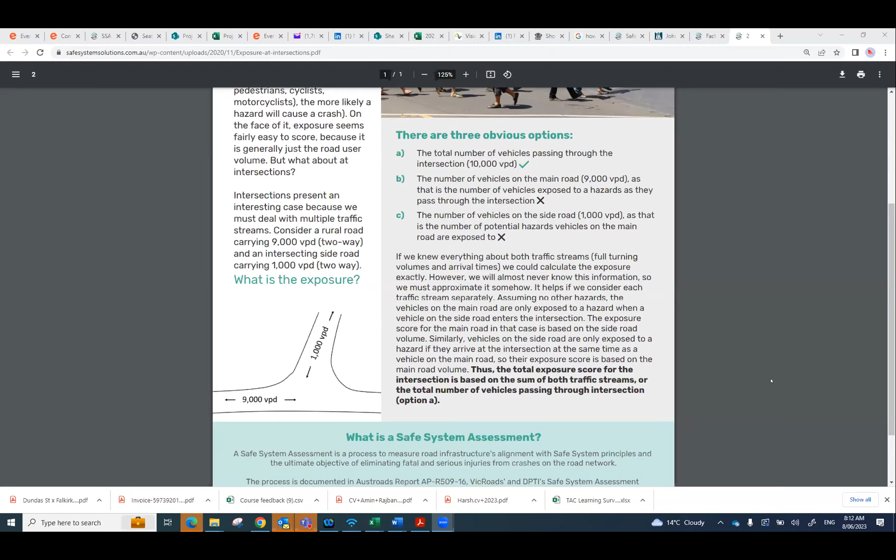Okay cool, thank you. Thanks Miles. And I think we might have another hand up even - this is great, yeah, we've got Alan as well. Hello Alan, I'll drop Miles away.

But there you go, as easy as that to ask your question. So hopefully Alan will find the unmute button there. Waving, hello, can you hear me? Yes. Okay, hello Alan, how are you? Yeah, good. Where are you calling in from? Yeah, from Christchurch. Ah, very nice. Yeah, so I have a question.

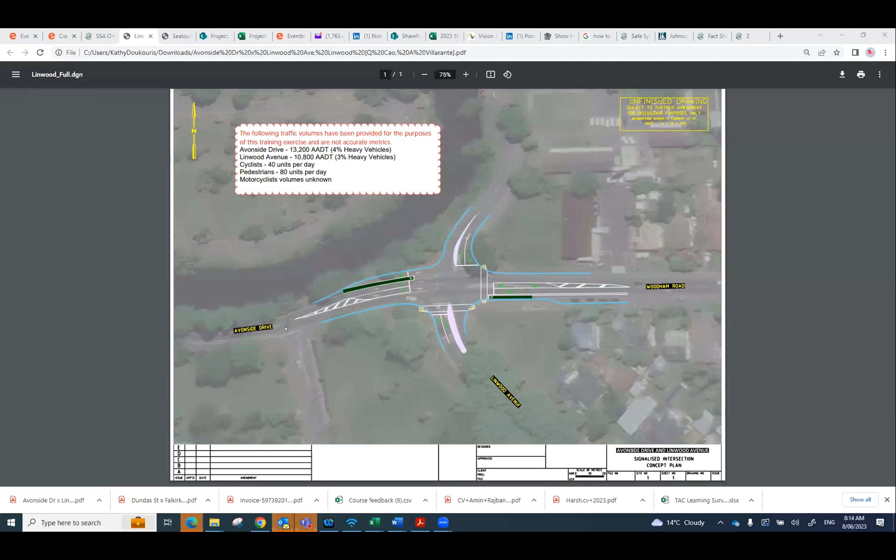My assigned task is about an intersection, and I went over the area and realized there are schools, a couple of high schools, both girls and boys high school, and then a church on another street or road, and there are hospitals. So to what extent will I analyze the intersection? Will I be focused only on the intersection, or from the intersection, how many meters for each road will I analyze? There are risks in each corner, four corners, so I want to understand. I would like to know to what extent will I be able to analyze the risks. Will it cover the schools nearby?

Okay, that's a really important question around defining the scope of your assessment and the limits of how far you go, because you're right, you could get to the school and then walk a little bit further down the road and see some other risks, and keep walking and then you've done a safe system assessment of all of Christchurch. We've got to limit this somewhere, and the nature of a lot of safe system assessing is around understanding the safety benefits of the upgrades and whether we can do more with those upgrades.

Your scope and limits of your assessment are usually dictated by the client in terms of what their project scope is. Now, you can push them a little bit and give some encouragement for them to consider other aspects. Certainly in one like this, I would be looking at the pedestrians and cyclists coming from the school and how they're going to cross that road - so how are they going to cross Woodham Road there.

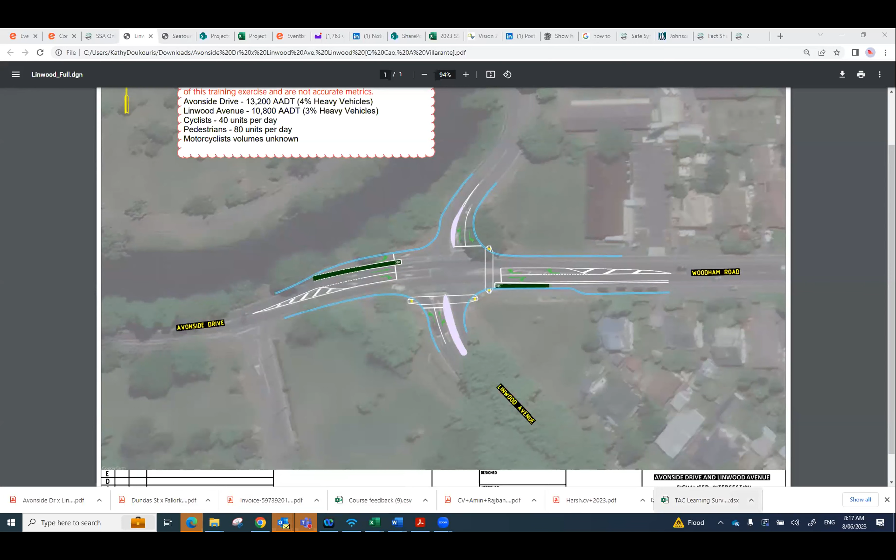That little side road over to the west - I'd include that just due to its... I wouldn't really be including it from a volume perspective, but more thinking about how it's influencing likelihood of crashes, and potentially severity of crashes, but more probably likelihood of crashes associated with queuing and vehicles coming out and the like. So it would play a more minor role in that, but certainly my focus would be on that intersection. So I haven't directly answered it, but you make a judgment call based on that.

What I'm particularly happy with is that you are thinking about land use, and you're thinking about what is that going to generate, and how's that going to alter our exposure, likelihood, and severity.

Correct. The presence of the school and the church facility and the like, to me, will certainly influence likelihood of crashes due to the fact that we know school kids are more likely to be involved in crashes - they haven't developed their cognitive pathways as much, so they'll take more risk without understanding the implications of that, and they're more darty, and hidden behind vehicles, and they skylark and play around and fall onto roads and things like that.

So that then can get factored into your likelihood of crashes, and thus you might be thinking more about features to slow vehicles down in the area, provide school crossing facilities, ensuring we've got connection of separated facilities from the school gates to the appropriate crossing points.

You may even, in a full safe system assessment, drift into some work with the school to talk about safe routes to school and how to use these facilities, and encourage people to use active transport modes on these certain routes to enhance safety.

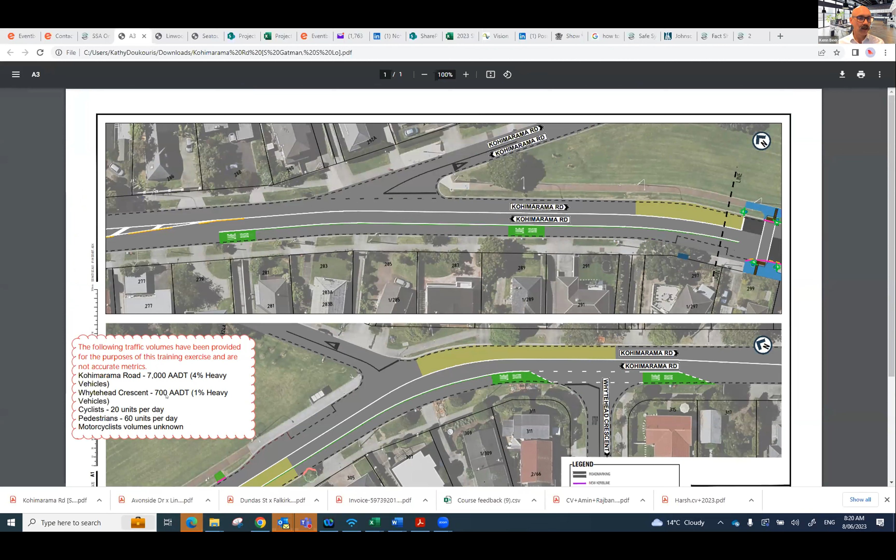Rightio, okay, let's have a look at this. So you're not going to add up each of the side roads and the main road volume. Well, for this one, it looks... so what do we got there? Whytehead Crescent, where's that one? There, okay.

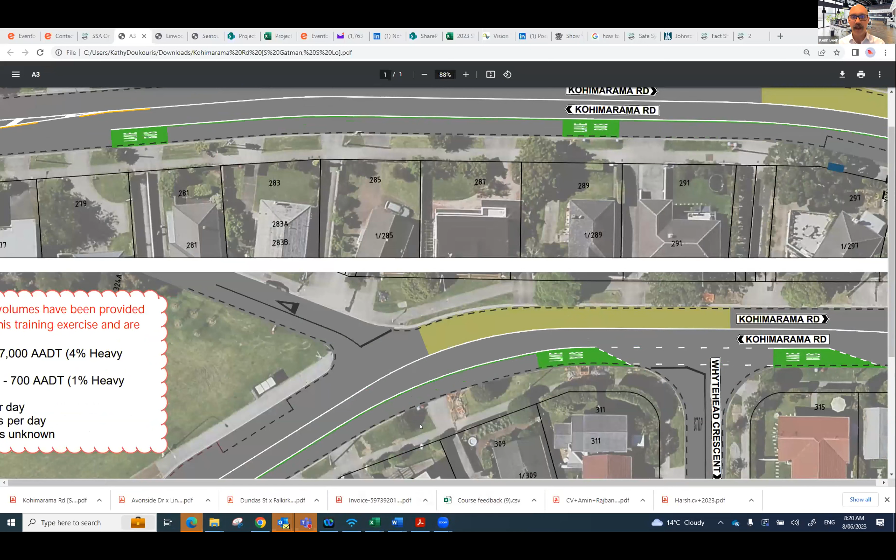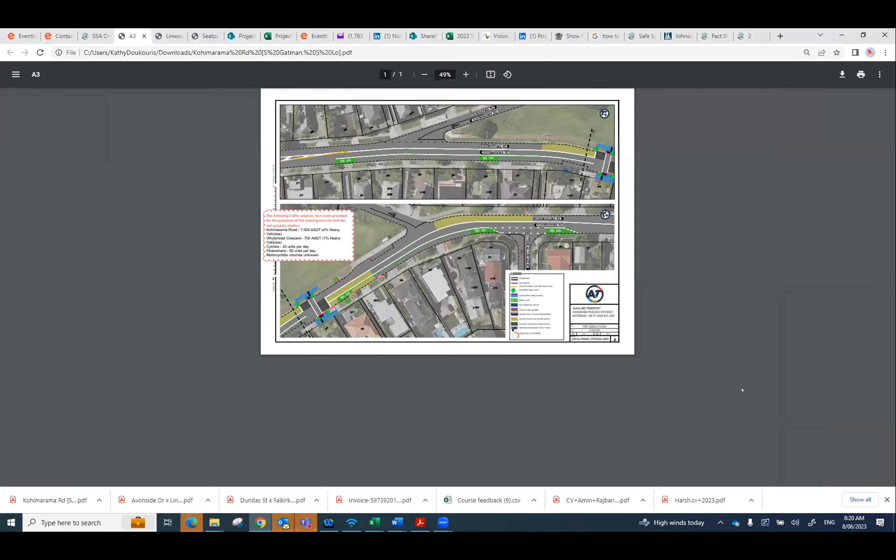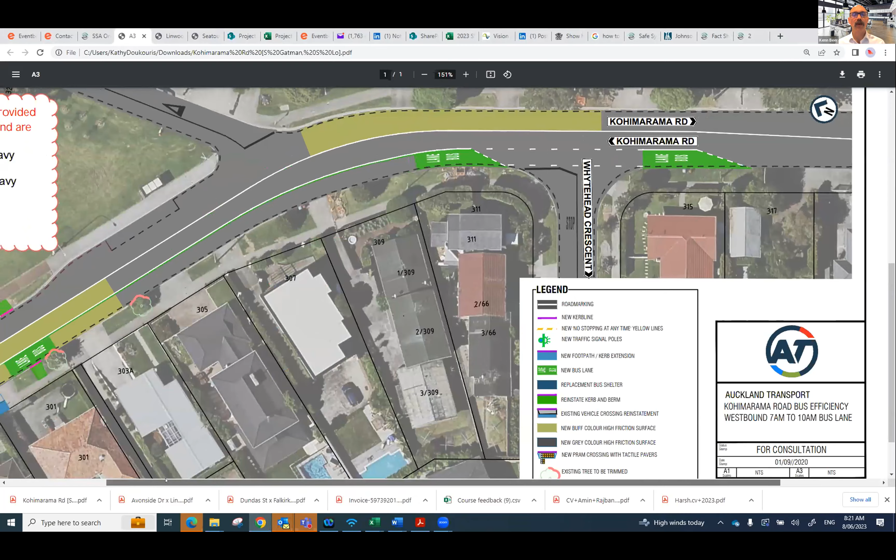Due to the fact that we have given you the specific volume of only one of those intersections, it sort of guides you to say that that is the intersection we would be thinking you would assess for that stretch, because we haven't given you volumes for the others.

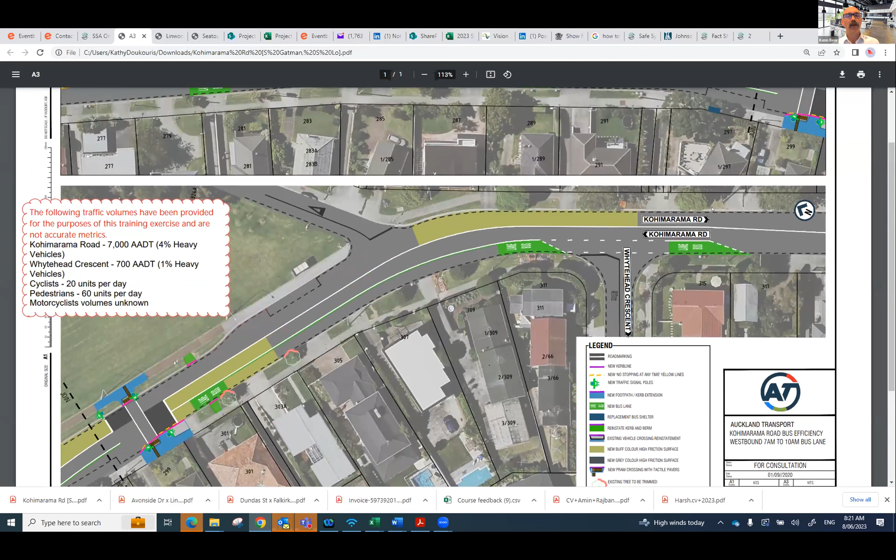However, if you wanted to, in a real safe system assessment, that's an option for you - just look at that intersection, look at the length of the road for all the other crashes. The other intersections may influence your chance of run-off-road and the like, but there is definitely intersection crash possibility at these other roads. So in a real safe system assessment, you've got 2 ways to try to deal with it. Either one, you do essentially 3 safe system assessments, where you cordon off those roads and they get their own matrix.

But because these roads have likely similar volumes, or they sit in the same band in terms of the categorization, you can simply use that band for exposure and then address your likelihood and severity of crashes based on the characteristics of the 3 intersections.

So you might pick the one there with the very odd angle coming in, and you would put... what is it, Kohimarama Road?

You might note that angle influences the likelihood of intersection crashes, and specify that for that particular road. The score would go up, but as long as people are reading the text, they know where that's coming from. It's like if you have the whole length of a road, you're going to have one or two spots that influence the likelihood and severity of a runoff road crash - particular power poles, trees, or curves - but you still give that runoff road score to the whole route.

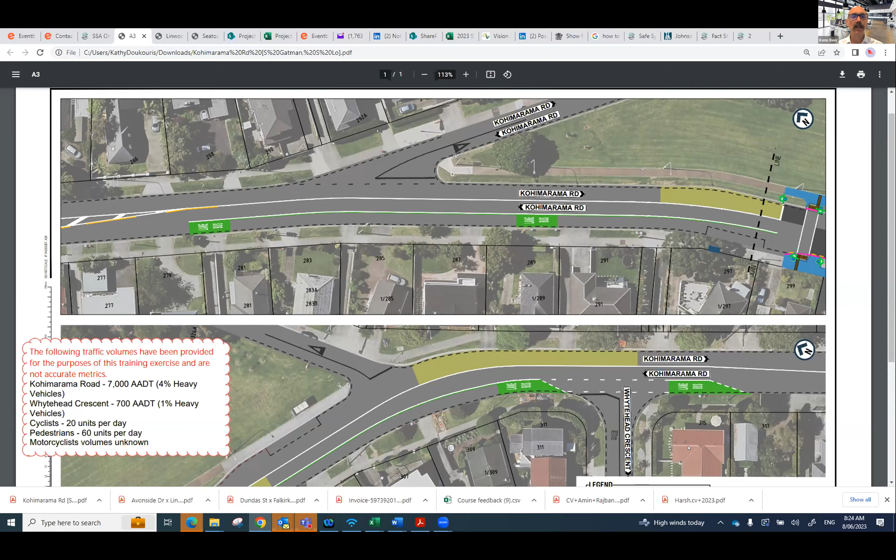Generally, intersections of like volumes can be lumped together, as long as their form isn't majorly different. If I had signals and then a roundabout, I wouldn't bulk them into one assessment - they're just too different. But these are all give-way controlled, and yes, they've got different likelihood characteristics based on things like sight distances, skewed angle, interaction with through roads, bus stop locations, and dynamic visual obstructions. But overall, they have somewhat similar risk characteristics in terms of exposure and severity.

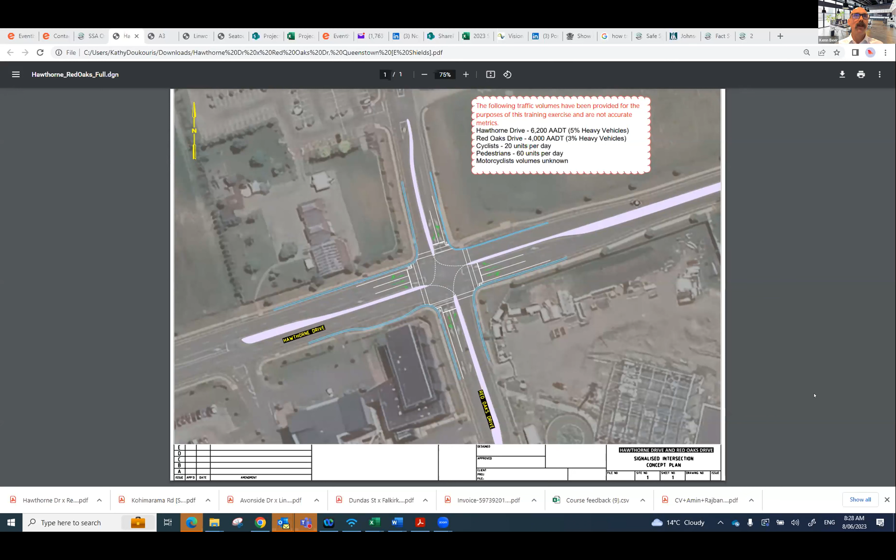The alternate way, and probably the one you'll use for this assignment at least, is to ignore it essentially for the scoring and the matrix. Put commentary in your recommendations around the interaction during market time. In a full safe system assessment, there are those qualitative questions I took you through at the end, and that's where, for this particular circumstance, you would probably have a lot of information around that one question.

In the qualitative questions, we said, are there special activities, on-road events, and those sort of things. So you would really get into that, and you say, well, okay, this is what happens, this is what changes, this is how it happens. If they're going to upgrade that intersection, we need to factor that in. Have we thought about this massive increase in turning volume or these big waves of pedestrians coming through? And you'd make lots of commentary around that, which would then potentially feed into recommendations.

Yes, so it becomes less rigid in terms of the assessment, exposure, likelihood, severity on all the different crash paths. And it becomes more than this supplement to that, to say that's all fine for the bulk of time, but at this particular time, we've got some changes happening.

Okay, sounds good. Thank you.

Well done, though. And again, another example of where we're thinking beyond just a typical design review. I mean, some design reviews would get into that in a wider sense, but really a lot of design reviews are just, is that curve radius meeting standard, and have we got adequate drainage? And these are important things, don't get me wrong. But then it's kind of like, that's done.

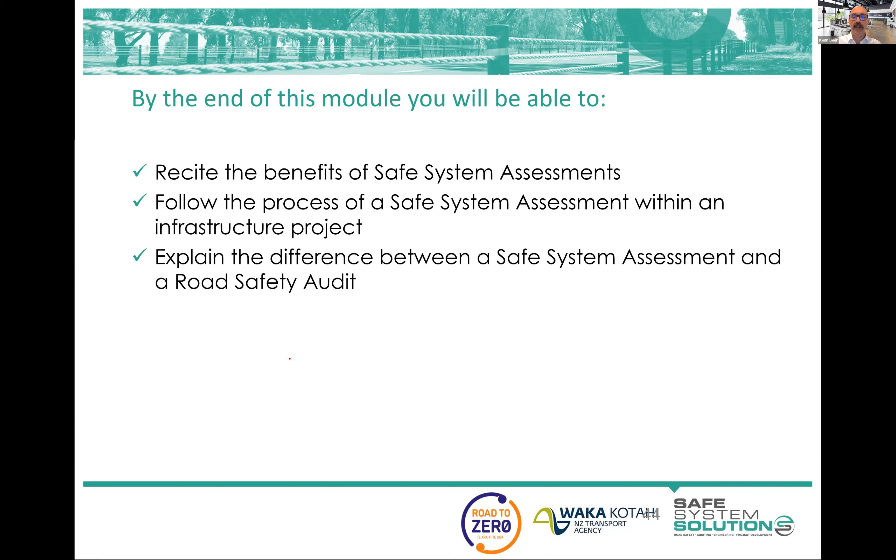What was done: there were 35 safe system assessments done on these big projects, and I'm talking big projects like town bypasses, major new duplications of 10 kilometers of massive arterial road network, new freeways, and alterations. So these are pretty big projects.

What he did was take a crash prediction model, a 20-year crash prediction model. He used ANRAM, the Australian National Risk Assessment Model, and coupled it with some traffic modelling, some predictions on pedestrians, cyclists, motorcyclists, and something else that was included, plus a bit more of an in-depth look at crash history.

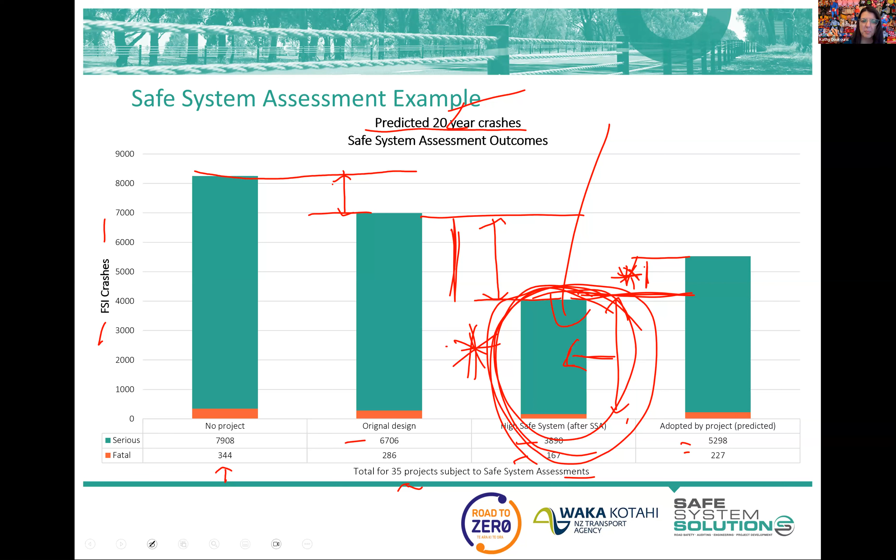Sure do. So does the safe system assessment consider the cost of changes versus the budgetary cost of any suggested changes? How do you convince... Okay, so follow up on that - how do you convince local authorities to adopt suggested changes? What is the extent of accountability of safe system auditors where serious injury or worse, fatality, occurs after those suggested changes were implemented?

Okay, so here's my disclaimer - I'm not a lawyer, seek legal advice, but here's my answer. The safe system assessment is an advice piece, and it remains an advice piece. It has no regulatory power. This is the same with a safe system audit - it has no regulatory power. The receiver of the report is not bound to do anything.

And they have an obligation to do what they believe is best. Now admittedly, they've sought out professional advice on this, so it's going to be pretty compelling if it ever finds itself in court that it's a reasonable thing to do. So in my 25 years working in road safety assessment techniques in one form or another, I have never seen a road safety auditor or safe system assessor held liable for recommendations they have made.

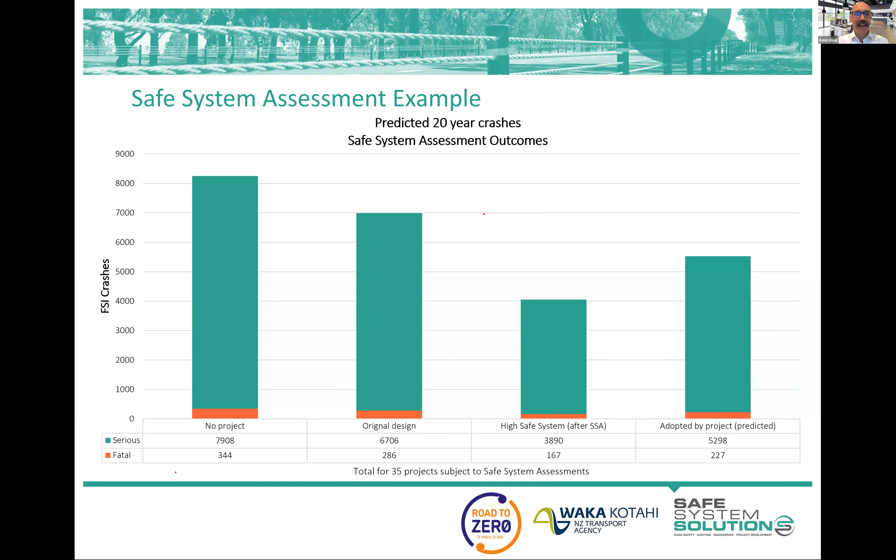Road safety audits on their own were never intended for that - you were actually told you shouldn't compare design options from that ranking or scoring perspective. Whereas integration of safe system assessments into the road safety audit process, for a safe system audit, is a really good way now to look at design options if you have more than one.

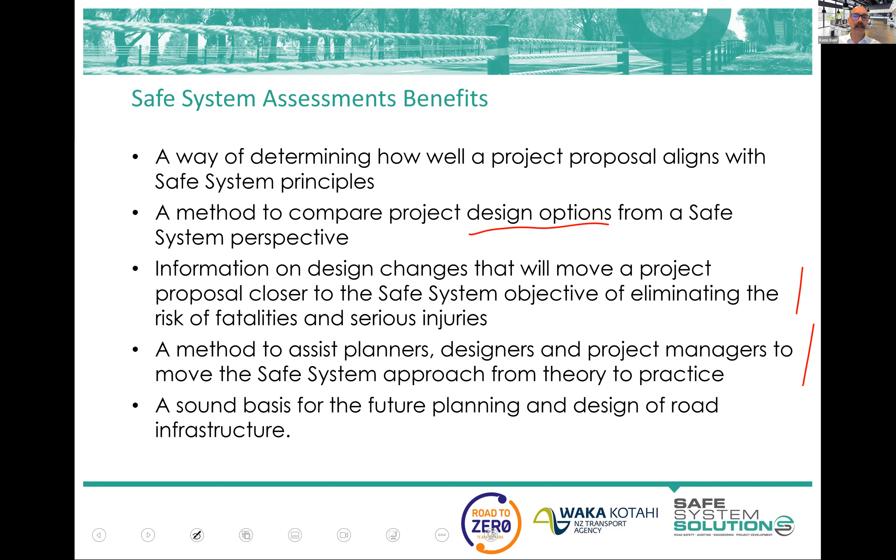Obviously changes to the design to improve safe system alignment are good for planners, designers, project managers to move safe system from theory and that sort of strategic philosophical concept to actual practical decisions on the ground, and a sound basis for future planning, road design and infrastructure.

So if it used to be that we were really focused here on safe system assessments at these early stages and road safety audits afterwards. But what the safe system audit process has done is really say, well, all of these should at all points consider these principles we've got. So it's just integrating them in there.

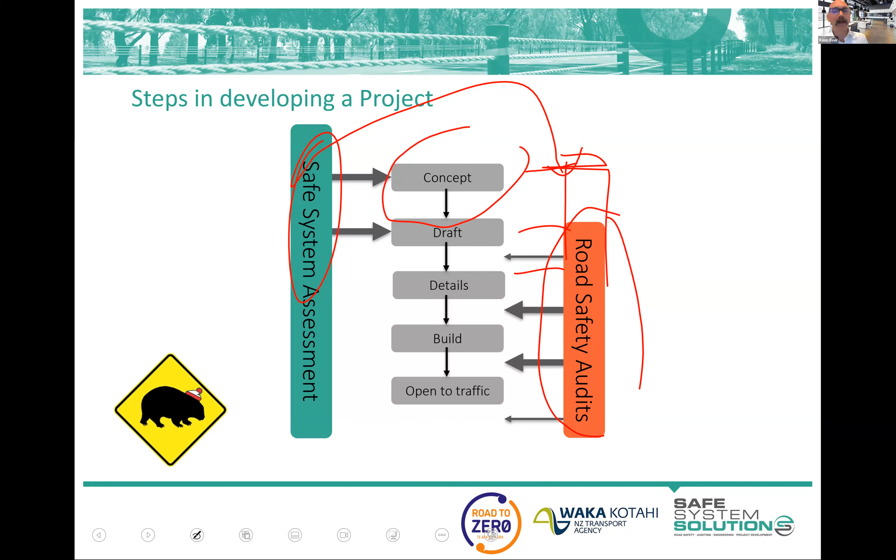I don't need to go through this because this was talking about some of the differences and things we do well in audits and safe system assessments. But now we've combined the two in New Zealand, and it is a world first that sort of combining has happened. So we're all sort of waiting with bated breath to see how it works out. I'm confident it will be a good thing and it'll work well.

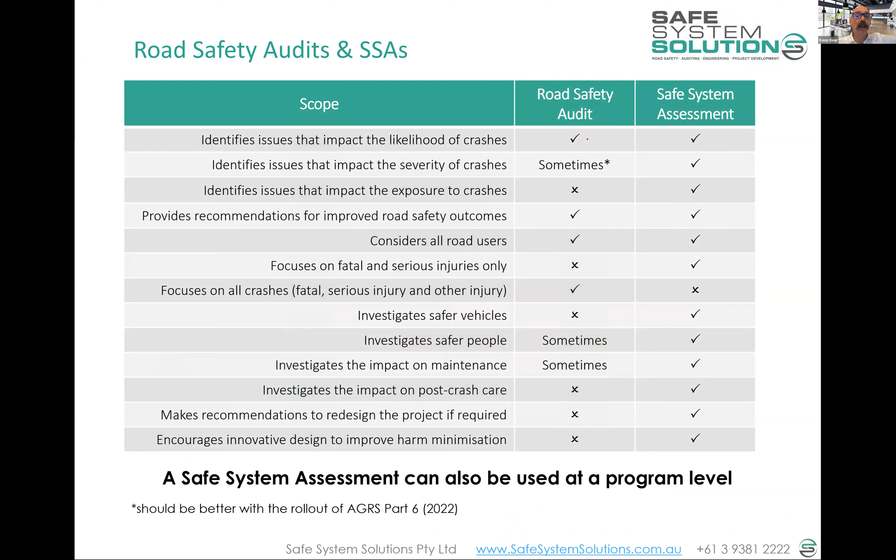But the process that a safe system assessment would go through would be to determine the type of assessment - that's already been covered. Sorry, the next slide I have the safe system audit process, but I wanted to take you through the safe system assessment process isolated, because you can still do that as a standalone entity, or certainly if you work in other jurisdictions, you might be just doing a safe system assessment.

But there are sort of rapid or full safe system assessments done around Australia, and used to be done in New Zealand, and they're close to each other. It's just that a rapid doesn't have some of those wider qualitative questions and a few other little bits and pieces. There's a selection of a team to do it.

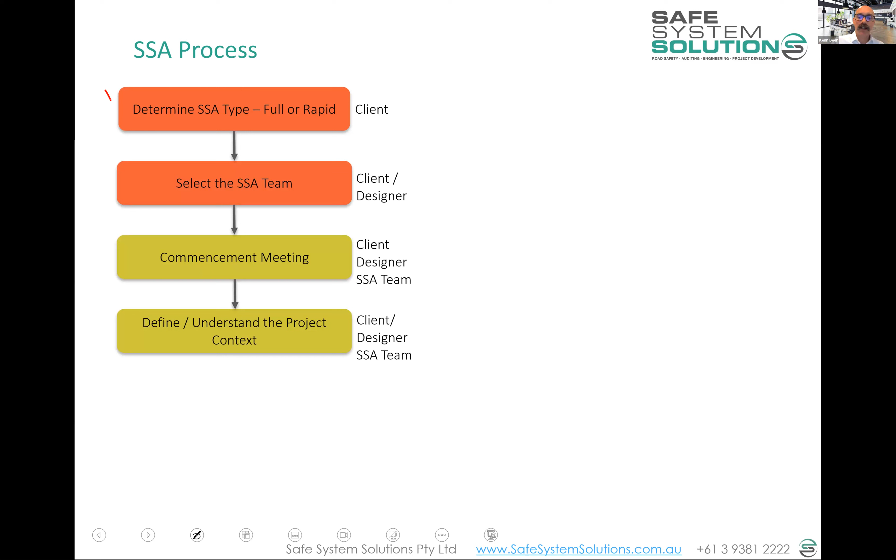There's some sort of handover of information and a commencement meeting and an understanding of the project, so everybody gets in the room together. There's site inspections done, the matrix is done, which you're into doing. Other elements of the safe system questions get you widely thinking about road safety and things we could do. Treatments to improve safe system alignment are recommended, and it's all reported up in a certain way.

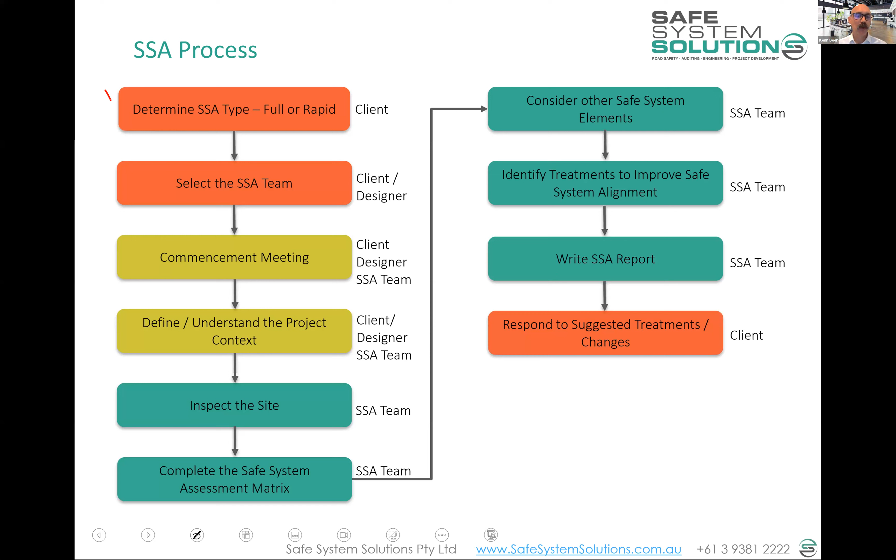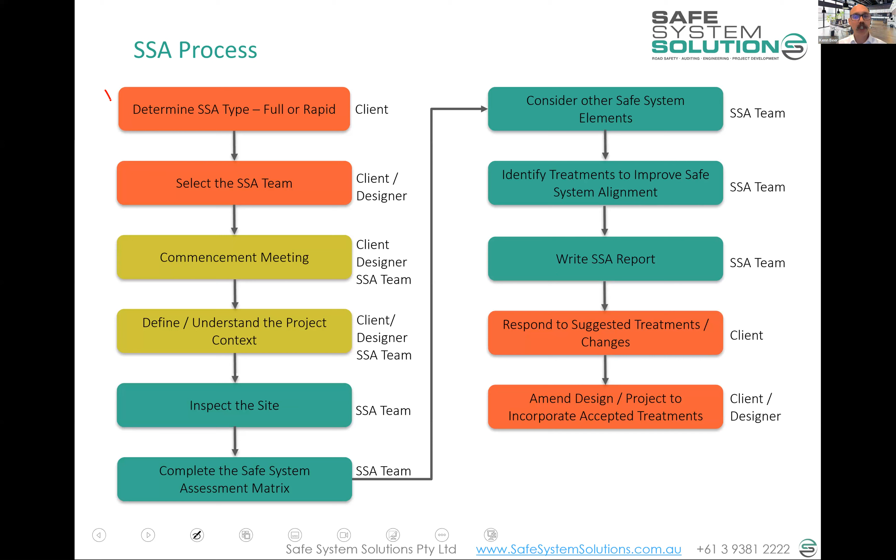And then there's some sort of work done by the receiver of that report to decide what they will and what they won't be able to do. And then agreed things are implemented and changes are made to that design.

Debrief meetings, one which is uniquely New Zealand, and I like it. It's the idea that you would sit with your client and discuss what you found before you hand over a report, or even start writing the report. You're talking about what's been identified, they give some feedback, and you discuss it. Very collaborative approach.

The report is written, it's handed over, the designer responds, they get some expert road safety input from a road safety engineer as well. Final decisions are made then, and the completed report with decisions all put together, and changes are implemented in the design or in the existing road environment, depending on what stage you're doing.

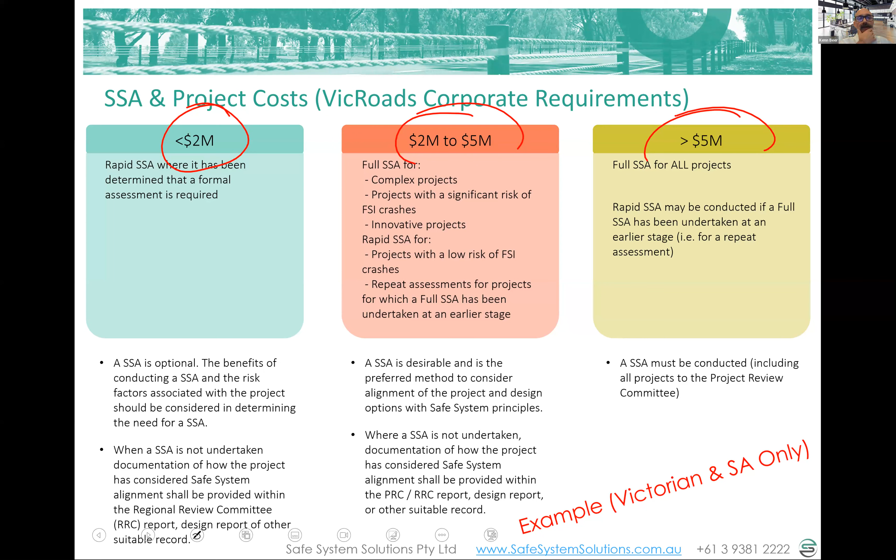An example here is that you can talk about requirements in terms of dollar figures. That's one way to think about the risk of a project or its potential to contribute to reduction in death and serious injury, and then have requirements for safe system assessments associated with that. So that's one option, I won't go through that in detail.

And in here I've also put in this full and rapid safe system assessment for your reference. It's not used as a defined thing in New Zealand, even with just normal safe system assessments. The safe system audit process is essentially a rapid safe system assessment followed by a road safety audit.

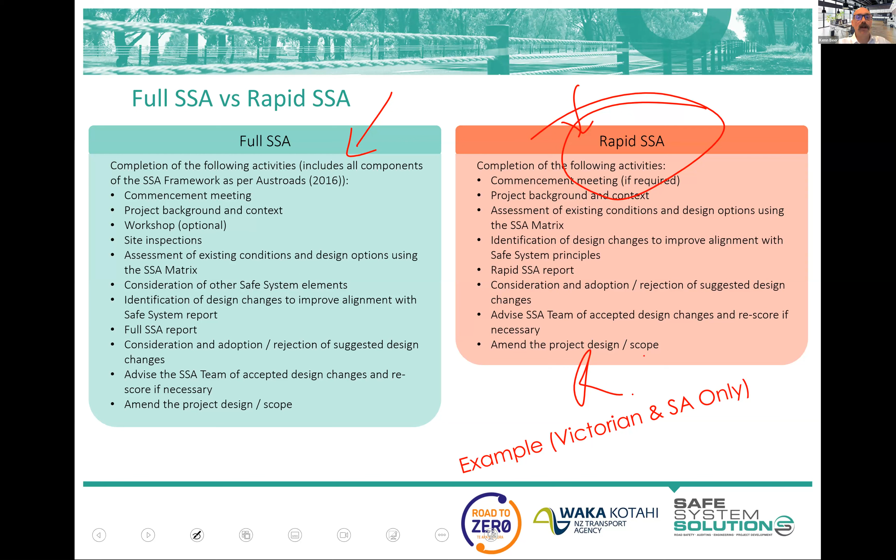Okay, I'll pause there Kathy, and see if we've got anything, and then we'll spend a little bit of time jumping through some road environments, and then hopefully give people 10 minutes back to finish off any quizzes outstanding and start to really press forward with their final assignment.

Promises, Ken. No, just some commentary about whether New Zealand's going to have a register or not. I've answered that in the chat, which is no at the moment. They don't have one, but they're looking at doing it, so stay tuned. Yeah, it's such a dilemma because it's administratively challenging, but what value does it get? Well, it can have value, but it can have downsides as well. People are on the register and then they're not performing great, but then they're very angry if you take them off. Yeah, anyway.

Okay, safe system road environments. I think with this group we've done a lot of this thinking already about what a road environment looks like that has high alignment with safe system principles. We had those lovely movement and place, one network framework thinking-style cartoons that we discussed, and this is sort of similar to that.

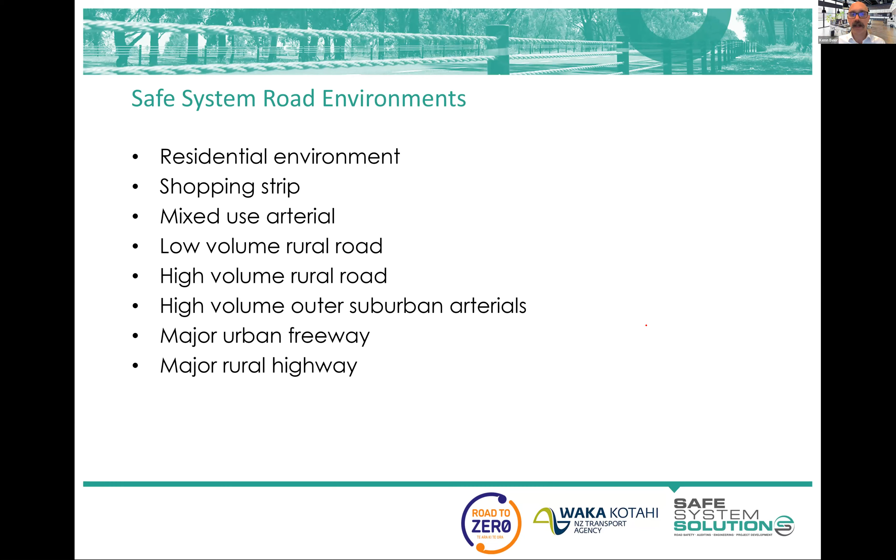Well, maybe I'll just get some input from the audience, because you're all so good. You know, these sorts of road environments, 50 km/h urban street, what are we thinking we could alter here that would align much higher with safe system principles? Type a few into the chat.

Okay. Lots of good thinking in there. Lots of good stuff.

I won't talk to all of them, but the immediate look at what speeds things are operating at, I think is a very logical thing. We talked about this in our session around moving to the One Network framework in these residential environments, keeping the speed up of vehicles as through traffic is not a priority. We can certainly blanket down speeds, and that should happen in our residential environments. There's no need for high speeds. And associated with that, anything being proposed to...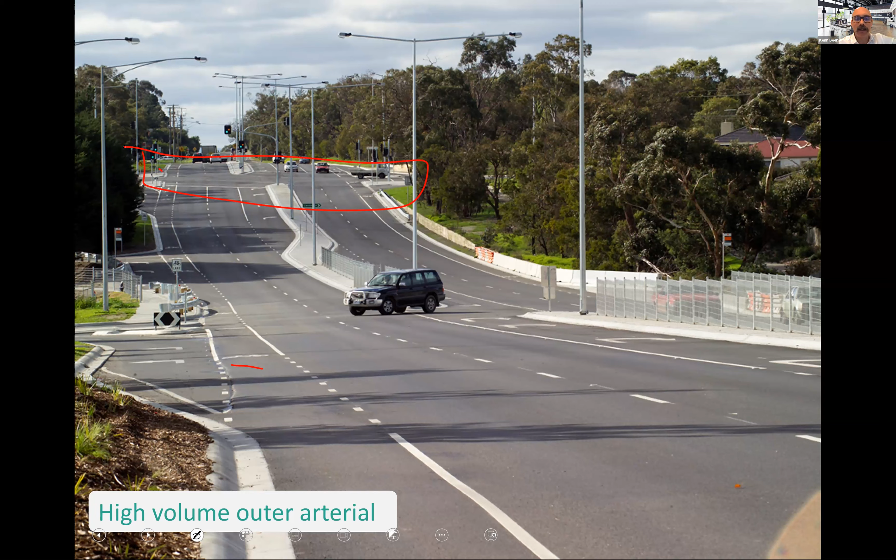And so raised intersections, signalised roundabouts, or grade separations for vehicles, separated facilities for pedestrians and cyclists. I'll take questions after I just cover off these last two very briefly.

Motorways have high alignment with safe system principles due to full separation usually. They have no intersections at grade, or when the on-ramps come in, the angles and speed differentials are good. The volume of traffic is high.

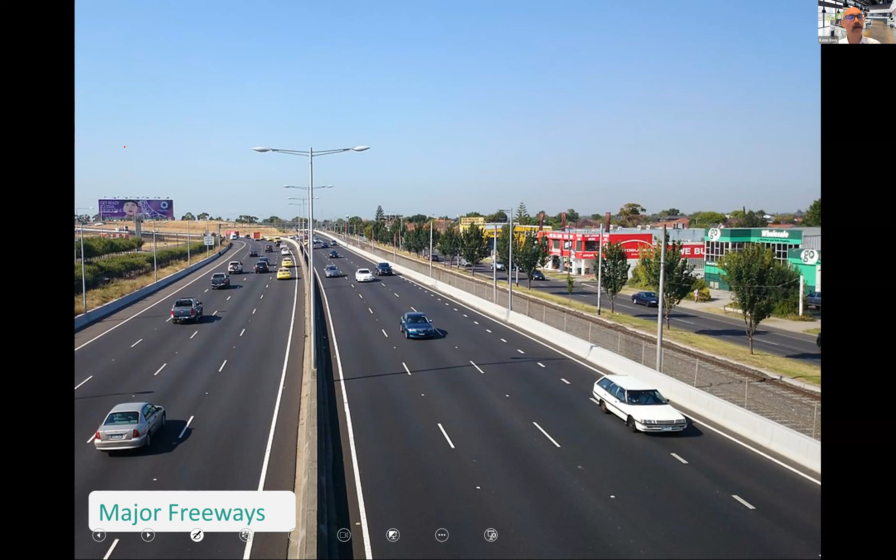So the use of managed motorways is sort of the last alignment with safe system principles area that we are really enhancing. A managed motorway has lane use management systems, freeway entry, ramp signals and the like. You're able to, through analysis of operations and incident detection, manage speeds of vehicles on the approach to lessen the likelihood and severity of crashes.

And it works for some of the problematic things, like pedestrians who have found themselves on the motorway, or got out of taxis at 2am and are wandering on the motorway, where you can actively reduce the likelihood and severity of crashes through bringing vehicle speeds down, providing warning and the like.

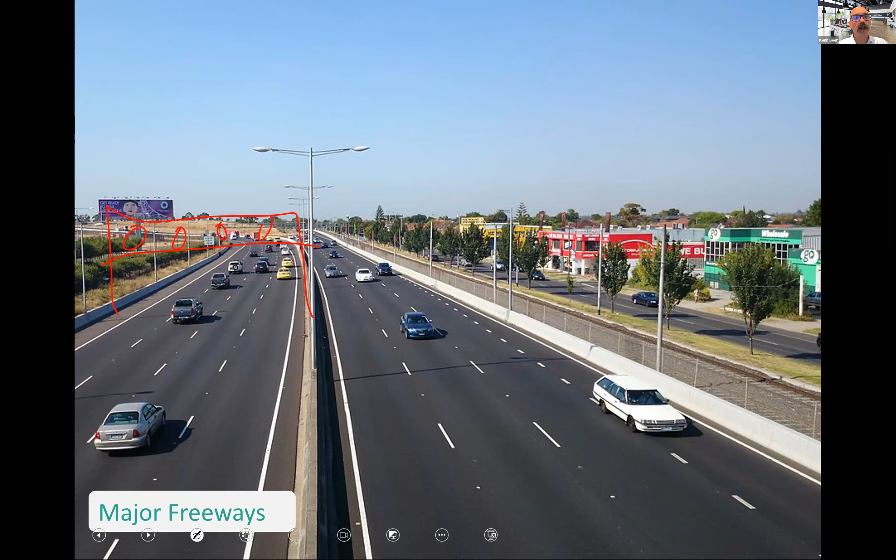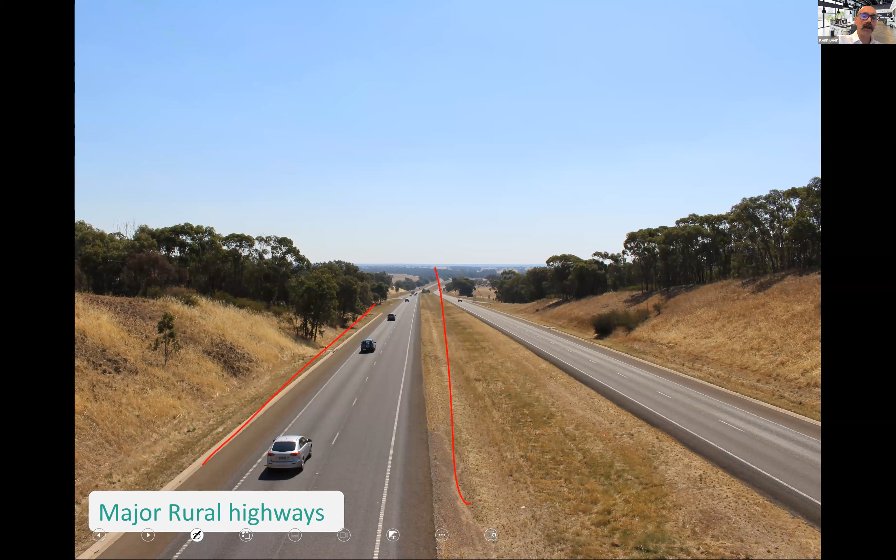And lastly, the biggest major rural highways - your state highway between major centres and those sort of things - it's just continuous barrier systems. There's no point even creating these big wide medians anymore unless you plan to build lanes into it in the future. Simply barrier systems down the middle with appropriate offset, barrier systems on the outside, and grade separated

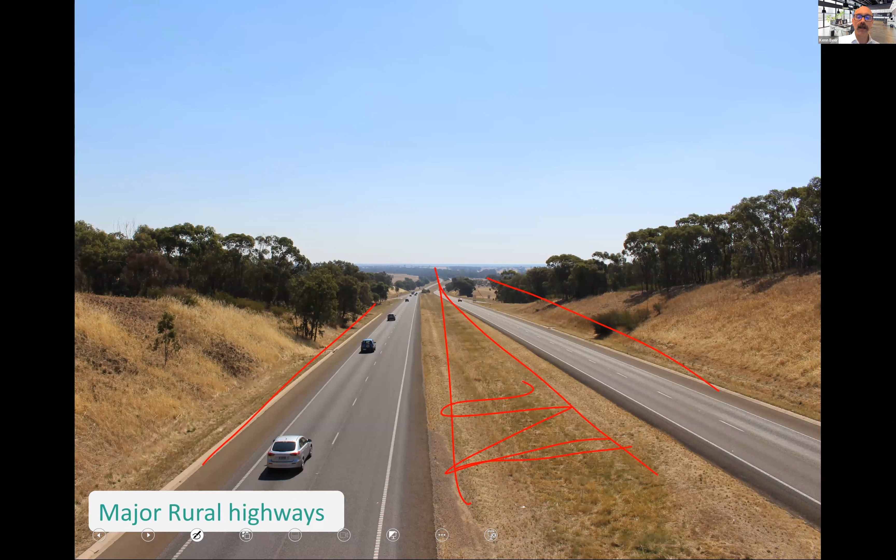interchanges. If there are any at-grade intersections, the choice is grade separation. That's the elimination of the exposure to crashes.

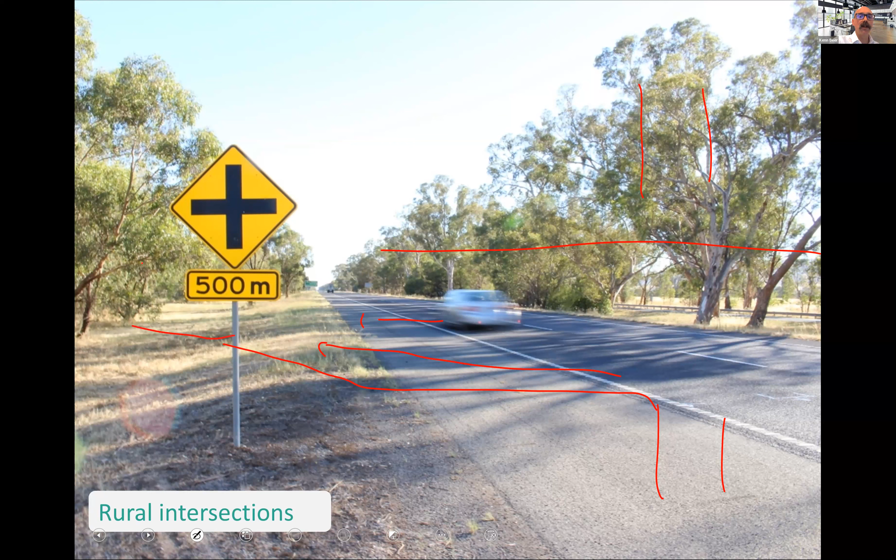Application of something that reduces speeds and angles, such as a roundabout, or if it must remain or you can't afford that, the real at-grade option that has high alignment with safe systems principles is essentially a large acceleration lane. So your delta V, your change in speed, is reasonable - blocking off the center and having them then U-turn, have an acceleration lane back and enter, and then either go that way or through. You're basically working on the principle that change in vehicle speed at the interaction point is within tolerable levels, but obviously think about your roadsides in those situations.

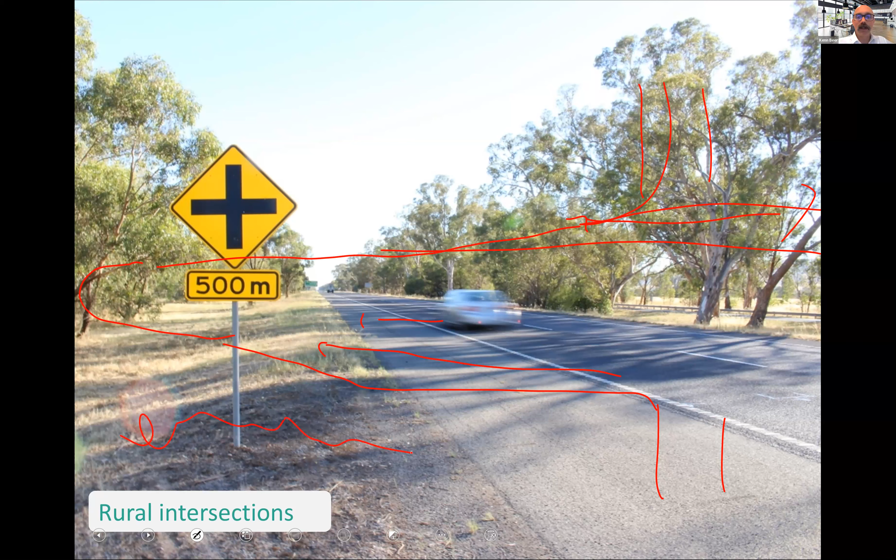Kathy. Questions? I raced a little bit there. I think, especially with this group, that's okay. I think there's a really good feel for things.

So there was a question about better guidance for compact roundabouts - is Austroads doing anything? I've got the Victorian road design note here in module 2, so that's a resource. I'm just racking my brain to think if Austroads is doing anything else in that space. I would look at 0403, which we wrote with the Victorian government - it provides some pretty good guidance and some examples. I can send the detailed designs for the Lance Creek one to anybody who is grappling with that. I can't think that Austroads has done anything in particular.

There was an earlier question as well that I missed. Can New Zealand safe system auditors apply for accreditation as assessors in Australia and be recognised here in Australia? That's a very good question. Can New Zealanders who've completed the safe system assessment course - the road safety audit course - apply for accreditation in Australia on an Australian register?